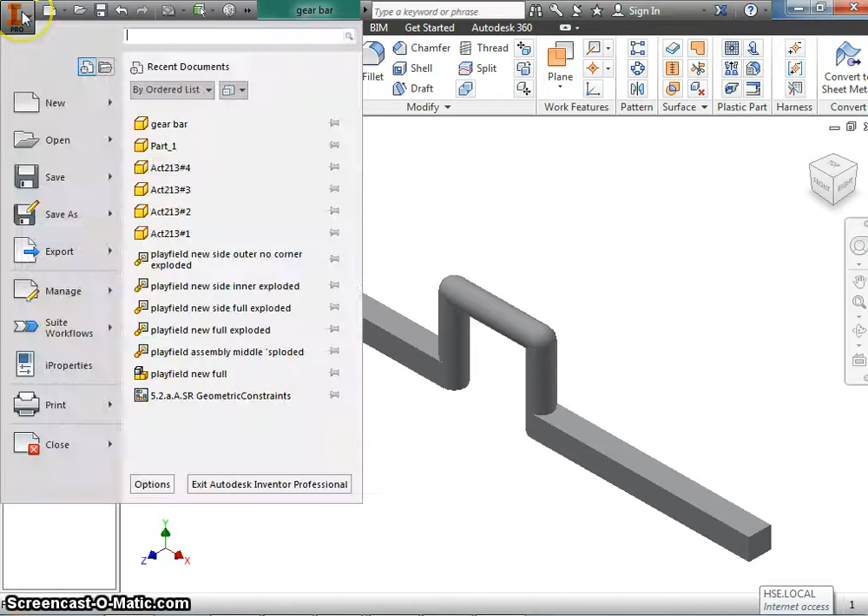So we'll go to File and Save Copy As. And now we change this right here to STL. We have to go into Options, and our 3D printer is in millimeters, so we need to make sure that our format is in millimeters and click OK. And then hit Save. We're going to put this just right back in that same folder.

And now we can go into our Makerware software.

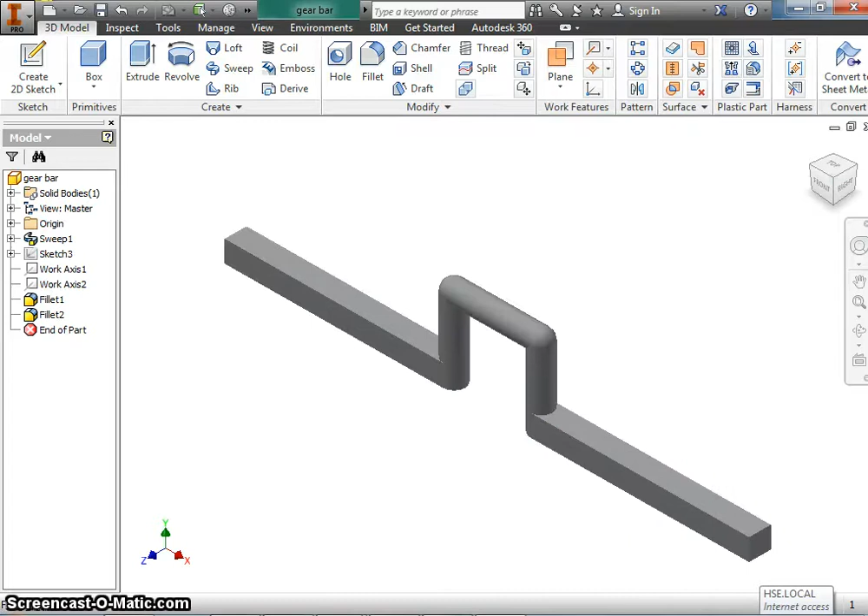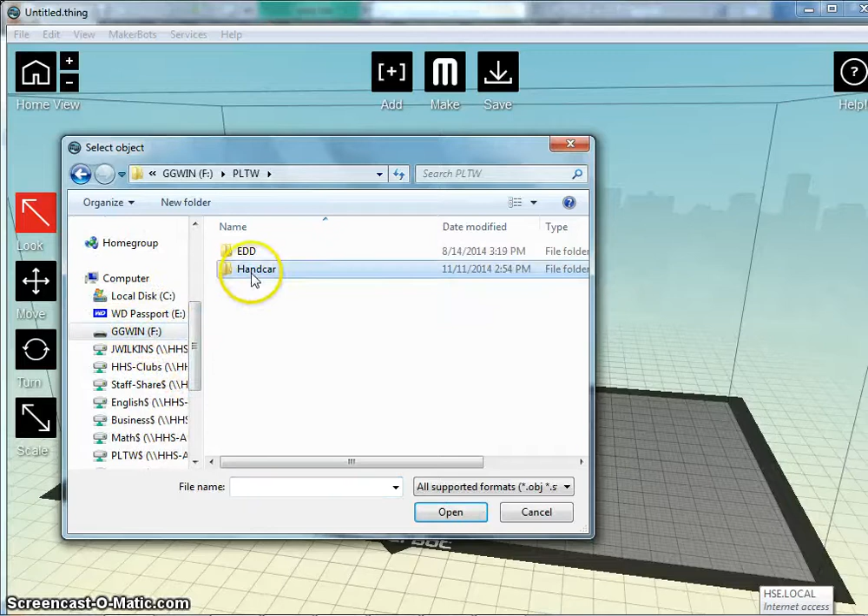So we go to File, we go to Open, or you could click on the Add button right here, either one. I'm going to go into that same folder, and there's the STL file for us.

We click on Move to Platform, so it kind of centers it, and we want to modify that build.

This is kind of one of those where you have to think about how you want to orient it. I would say that I'm going to orient it, or rotate it 90 degrees, and then put a support underneath this to build this part. This is a tough one. We might do this twice. We might duplicate it and try it each way.

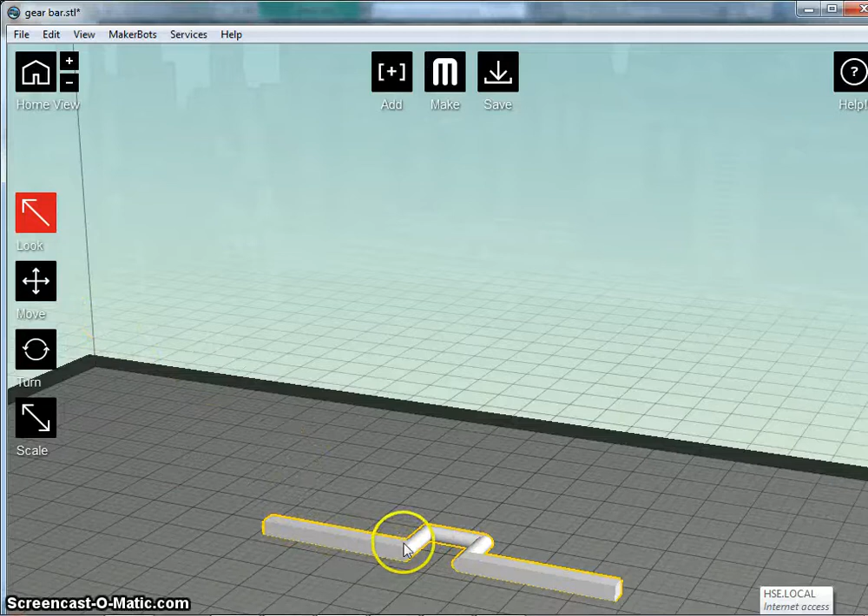This is a small part, so I wouldn't worry about that, but usually I want to pick a flat side. The problem is this right here has to be round, so it makes it a little difficult. This might need some processing at the end with some sandpaper just to make that a rounded value, but this might be okay to print this way without support.

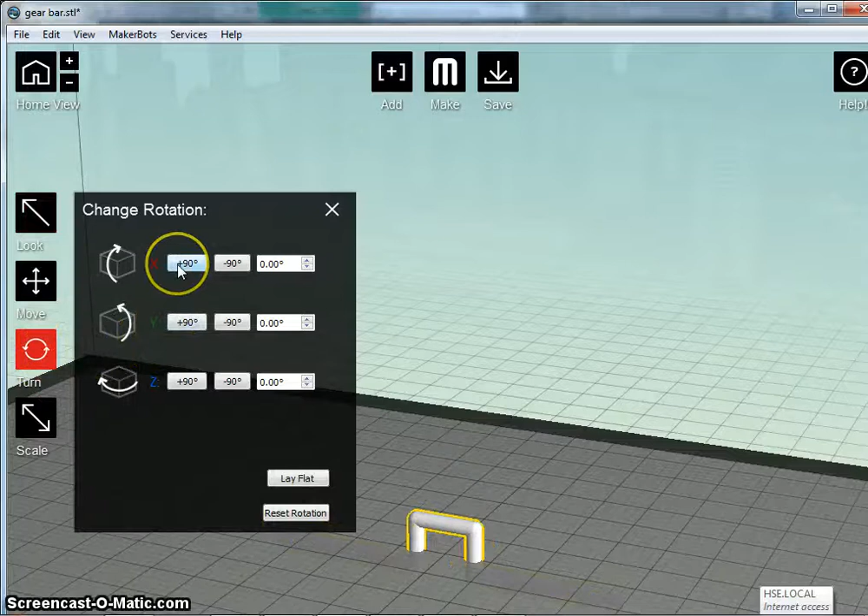But if you click on Turn, you can just rotate it 90 degrees and lay it flat, and now it will put it on the platform there.

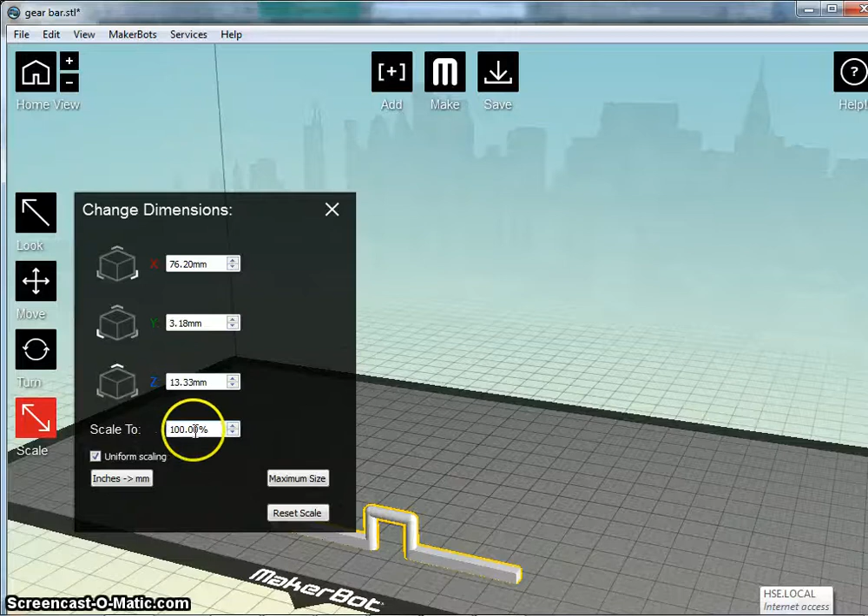I can move it, so if I want to move it more to the front of the platform, I can. That's essentially it. I could scale it if I want to, so I could change the scale to 150% or 50% or whatever. And then Look just allows you to look at the different views, front, side, and top views of your print.

Once you get it to here, you click on Make. Make sure you have the right device. We have a Replicator 2. We're using PLA, not the flexible filament.

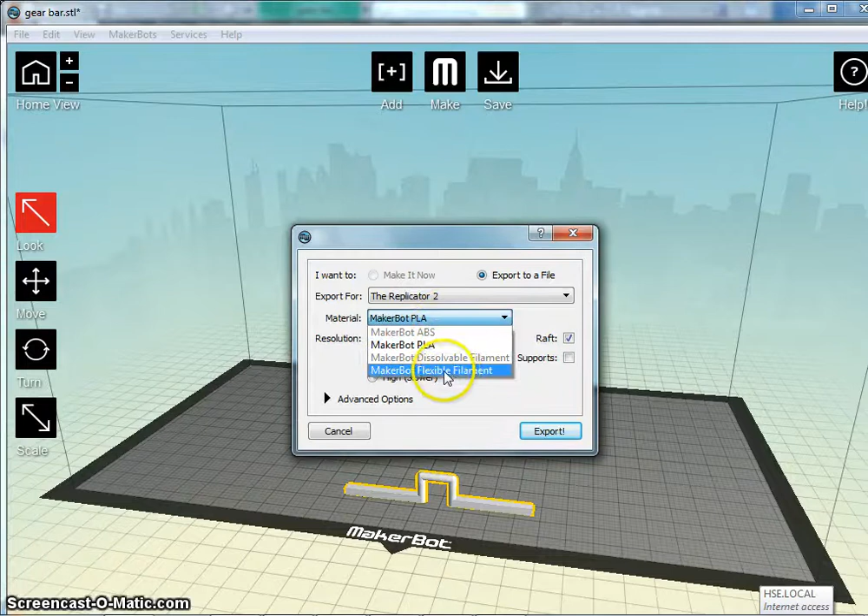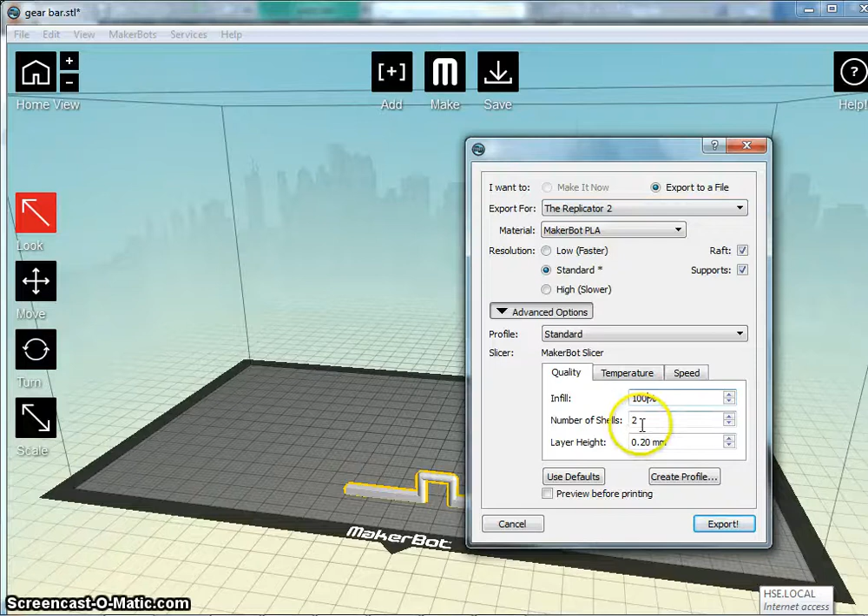This I would probably put a raft and supports on just to do this here. And then this is the resolution, I would just leave it at standard - it works pretty well. Infill of 10% and shells of 2 usually works pretty well. For this piece, you might do an infill of 100%, so it prints solid. It's a small piece, so I would have no problem doing that. That way it gives it a little bit more rigidity as well if you're going to be applying a force to this. But for the most part, 10% infill works pretty well.

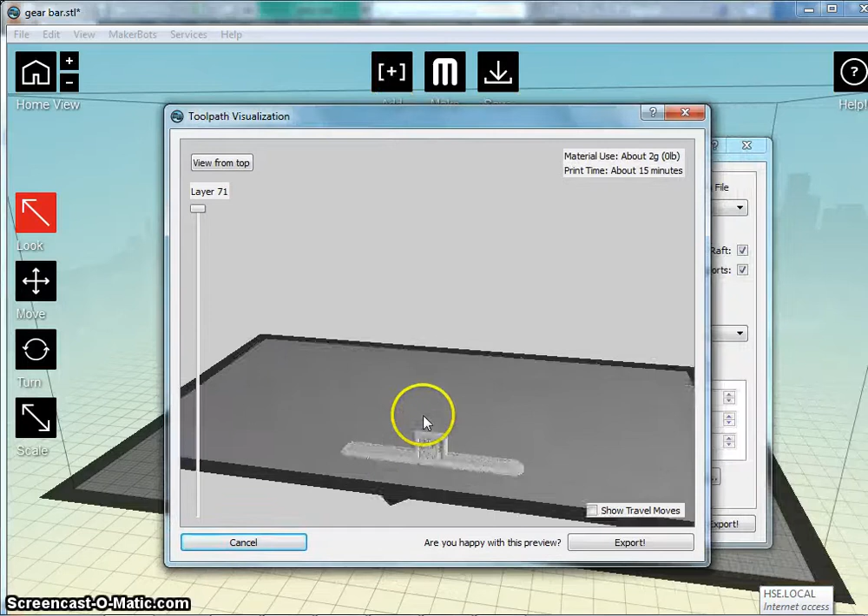Once you're done with that, you can do a print preview, and if you hit export, it's going to slice, and then it should show you the time and how much material you're going to be using. It also shows you the build right here, and you can go by layer to see how that build is going to be made. It tells you it's going to take 15 minutes and about 2 grams of material, so this is pretty inexpensive.

If you're happy with it, you can click export, and we're going to export it to an SD card.

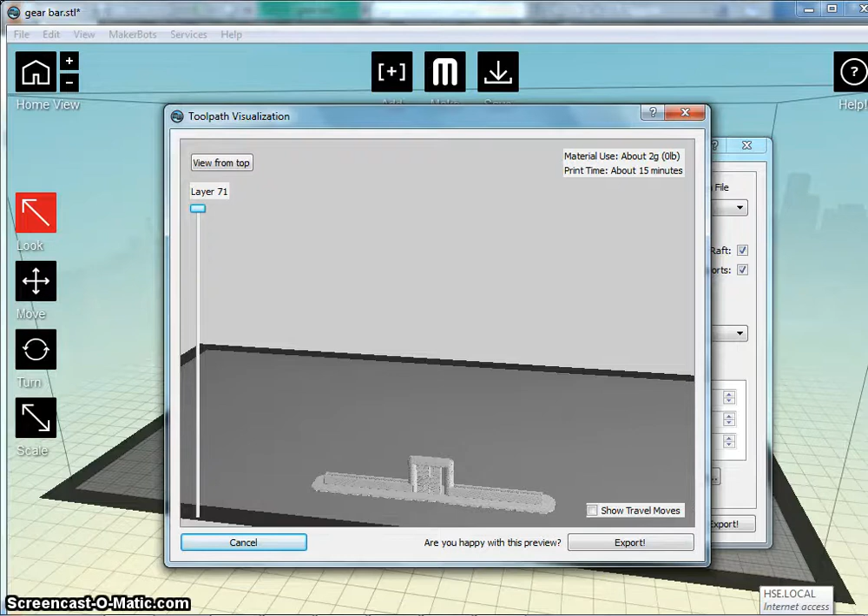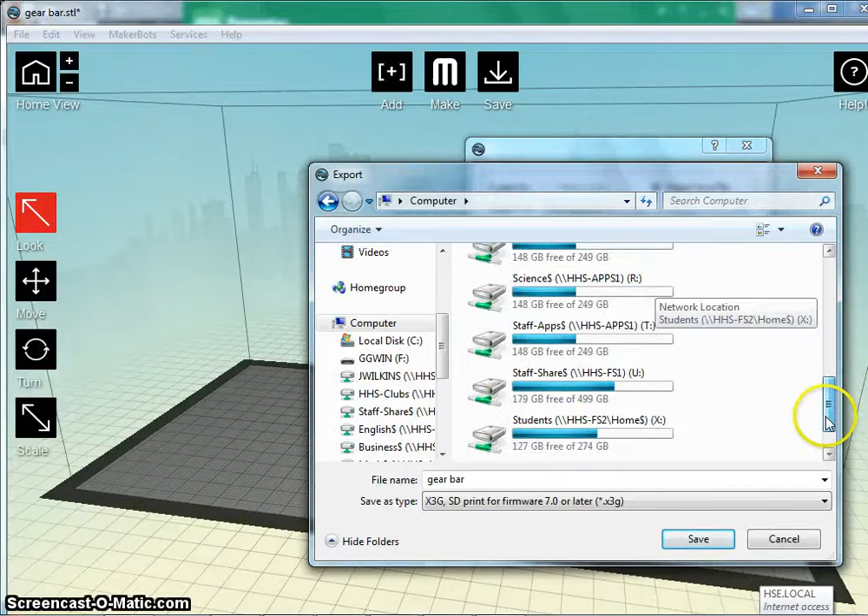And then I'm going to click on export and pick that SD card. So it should show up. There it is. And then gear bar. Easy enough.

Alright, once we're done, we're going to take this SD card over to the 3D printer, and it's pretty straightforward from there to get it to run.

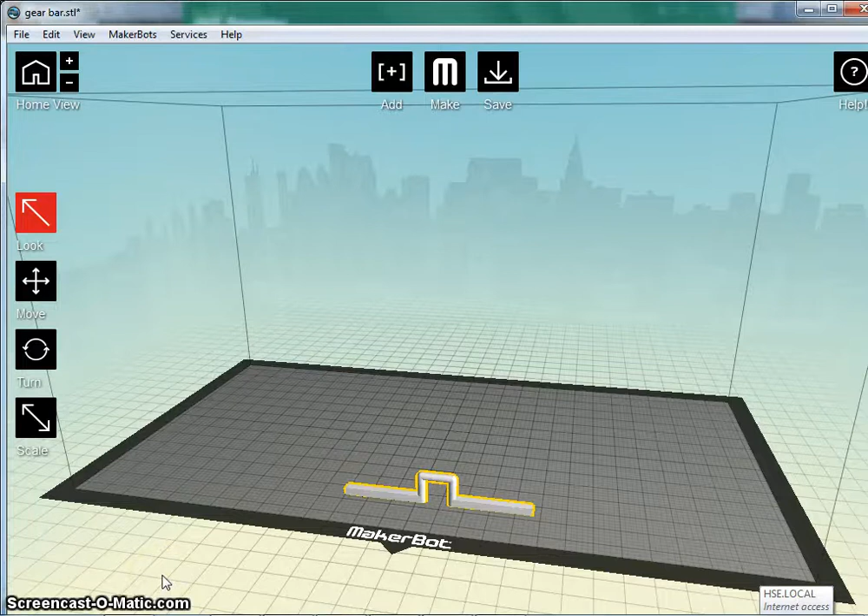So hopefully that helps you get it from an Inventor file to an STL, into the MakerWare software, to a file that we can now put on our 3D printer. Have a great day.